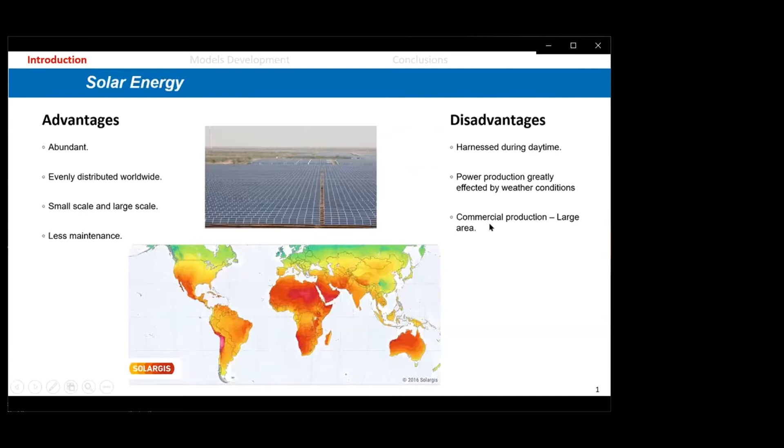As you all know, solar energy has certainly a lot of advantages such as abundance, almost evenly distributed worldwide, less maintenance, and so on. However, it also has some disadvantages, such as the fact that we cannot harness energy during night time. Also, another problem is it may require large areas for installing a PV, for instance.

Now, PV system performance. The overall performance of a PV system relies on four metrics: the performance of the radiation and optical part, then the thermal performance, the electrical performance, and the structural performance. The radiation optical performance is measured by incident and absorbed radiation. Thermal is measured through the PV cell temperature, and the electrical performance is through the maximum power and efficiency, electrical efficiency. The structural performance is a measure of the lifespan.

How long would the PV panel last, actually? Currently for polysilicon PV panels, which I will be considering in this study, the lifespan given by the manufacturer is about 25 years. But this is completely dependent on the weather conditions where the PV panel is installed.

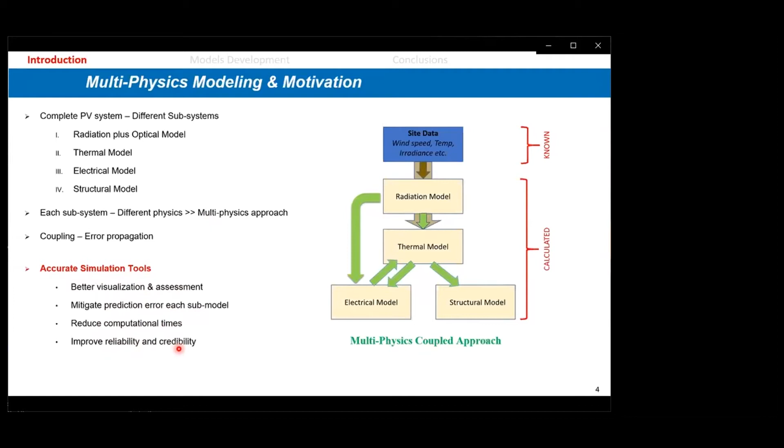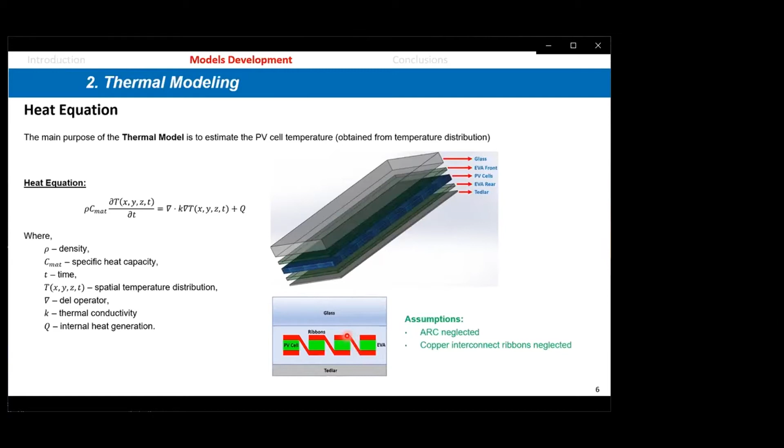In our development, we first started with a one-dimensional finite difference model to calculate the temperature distribution through the thickness of the panel. Then we extended that to a two-dimensional finite difference model implemented in MATLAB. We also used 2D finite elements and three-dimensional finite elements using the commercial software ANSYS.

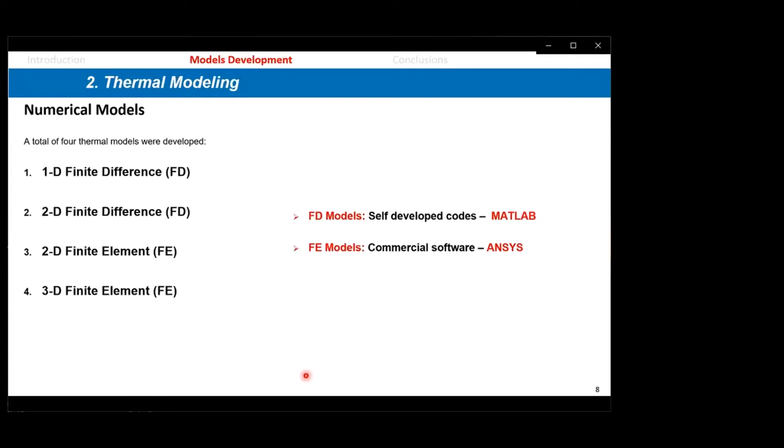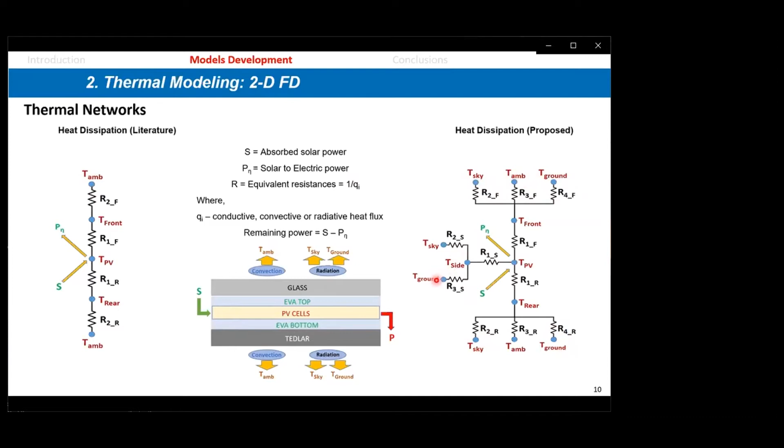As you can see here, the top sink temperatures are defined differently from the existing model. The bottom as well as the sides - we included the effect of the sides as well. By doing so, we were able to increase the accuracy of the prediction of the temperature distribution in the PV panel.

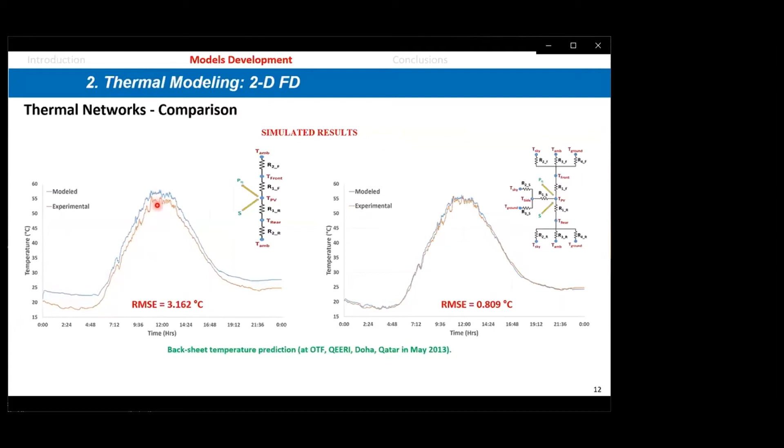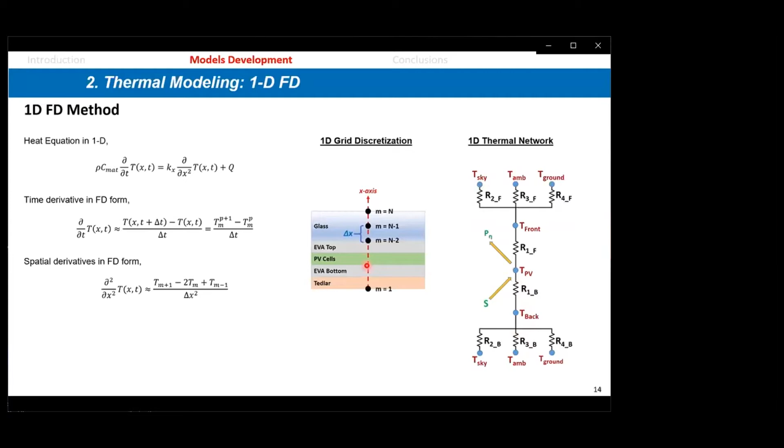Now we would also like to show you the results from one-dimensional modeling. We did the same thing for one-dimensional, because the previous results I showed were for two-dimensional finite difference. For one-dimensional, we introduced again the same boundary conditions at top, bottom, and side, and we were able to also improve the results for one dimension.

However, 2D is needed if you want to look at the distribution, not just through thickness, but also in the plane of the panel.

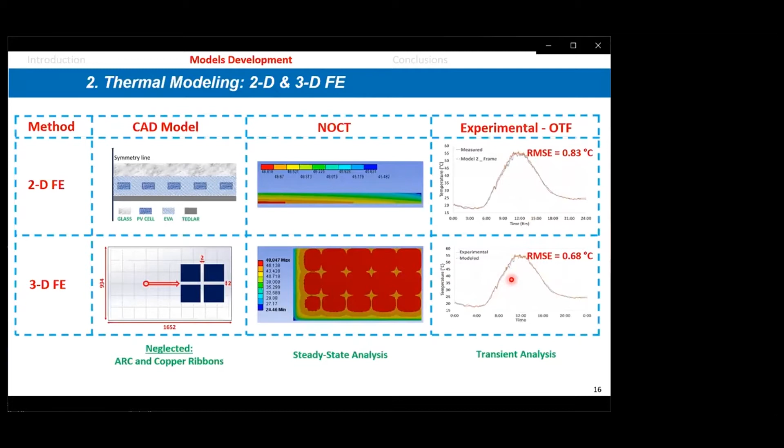So with an RMSE of 0.83, 2D is enough, in fact, unless we are looking for more details, as you will see later for the structural analysis, where we certainly need to go to 3-dimensional. But we will see how we can reduce the computational time in the structural modeling.

Now, for the electrical modeling - electrical modeling is done to estimate the maximum power. As you can see, we talked about radiation modeling, we talked about thermal modeling, now the electrical.

So either we can get the Pmax from full modeling of the IV curves, or there are also some simple relationships given in literature if one wants just to estimate the maximum power. As you can see from this paper that summarizes existing relationships to estimate the power, there are many models. So which one to trust all depends on the application.

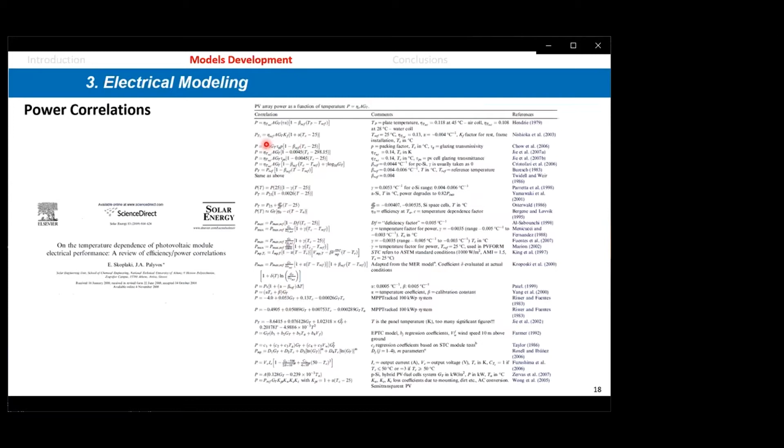In our case, we decided to go ahead and use a full model for the electrical model, simulating the IV curve using the 1-diode model. As you can see, the 1-diode model is given by this relationship here, which involves 5 parameters, and this is the drawback of this type of modeling.

So how to estimate these five parameters, which include the photocurrent, diode dark saturation current I0, series resistance, shunt resistance, and ideality factor - usually we use iterative methods or optimization techniques to estimate these. But the other thing is these 5 parameters depend on both the irradiance and the cell temperature, so how do we include and account correctly for the effect of irradiance and cell temperature?

If we look at the literature, De Soto and co-workers proposed what we call translation equations for the photocurrent, which depends on the irradiance and the cell temperature. The I0 depends only on temperature, the series resistance is constant, the shunt resistance depends on the irradiance, and the ideality factor depends on temperature. So as you can see, most of them depend only on temperature or G, one of them is constant, and only the photocurrent depends on both temperature and irradiance.

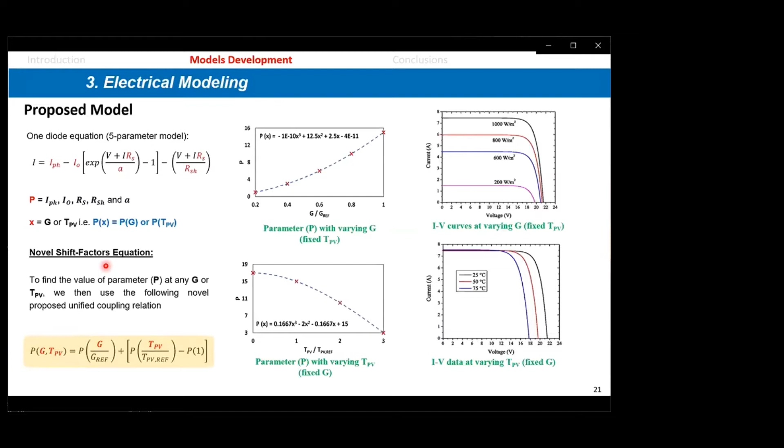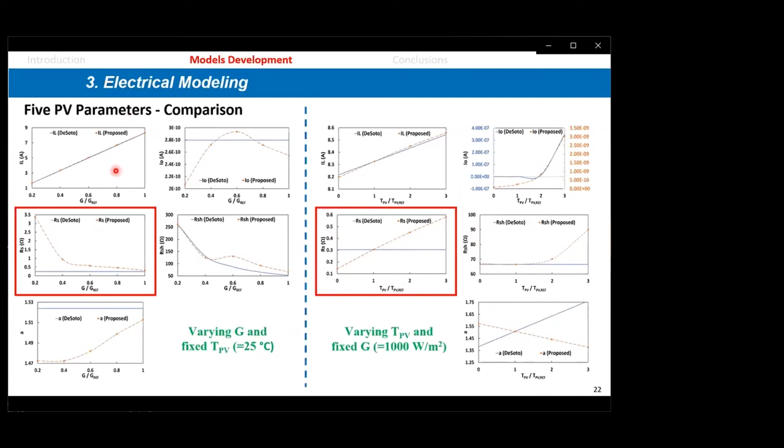If we compare our results to those of the De Soto estimates, the photocurrent is the same if we keep temperature constant and vary irradiance, but the other parameters are completely different. The series resistance is constant by De Soto, but in our case it varies drastically. The same thing if we keep irradiance constant at 1000 watts per square meter: the series resistance is constant by De Soto, but in our case it evolves a lot. So for both fixed temperature and fixed irradiance, our model predicts completely different results from De Soto, except for the photocurrent, which are very close.

Now, comparing our predicted results to IV curves, for a wide range of irradiance from 200 to 1000 watts per square meter, our model predicts very well for all of them, but De Soto predicts only the case for 1000, not the other cases. So our approach is much better in terms of accuracy of prediction.

Now I move to the last part, which is the structural modeling, where we involve continuum mechanics to analyze the fatigue behavior of PV panels and failure.

Looking at the different loads the panel is subject to: it could include wind, hail, snow, weight, and so on - this is the mechanical load. There's also thermal load, due to temperature variations during each day, and radiation, which leads to UV degradation of the EVA, the polymeric material. One may also include chemical loads such as moisture, which increases corrosion.

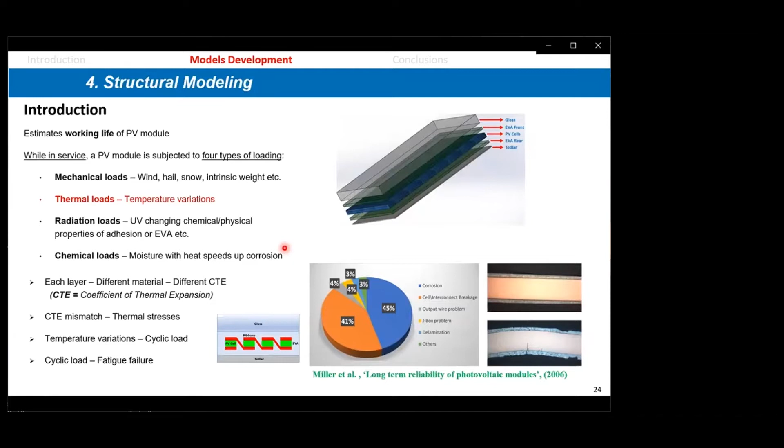Now, to perform simulations of this fatigue behavior, one can run a three-dimensional analysis, which is computationally heavy. We did not go this way. Instead, we took only one string of the panel, not all strings, and performed a two-dimensional analysis.

Once we found the area of maximum stresses or maximum deflection or deformation, we focused on that area and used a three-dimensional finite element method. Our proposed modeling is called two-dimensional global and three-dimensional local.

Based on one string, two-dimensional simulations, we define the maximum deflection, which leads to maximum stresses, and it happens to be in the central part of the copper ribbon, as you can see in this case, which is not surprising.

Now we take whatever boundary conditions in terms of temperature and stresses apply to this, and we use a three-dimensional finite element, as you can see from this 3D mesh, to analyze the fatigue behavior of the interconnect.

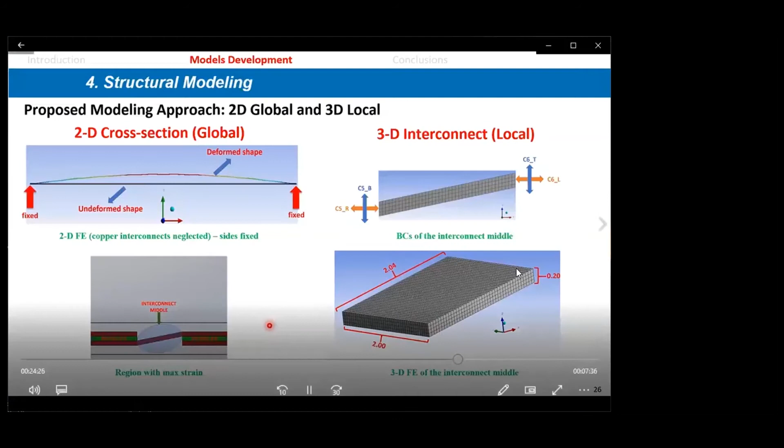Now, to do so, we need to assign mechanical properties or constitutive laws for the different elements forming the PV panel. Silicon is taken as linear elastic with the coefficient of thermal expansion varying with temperature. The copper also has CTEs varying with temperature. The glass is linear elastic, and silicon is also linear elastic. The copper is in fact elastic-plastic, so it has linear elasticity.

Then we get to the yield point, and then we have plasticity. So we considered linear elasticity with plasticity, with hardening, and this is kinematic hardening. For the EVA, which is a polymeric material, this is a viscoelastic material which is also highly dependent on temperature. We took a viscoelastic model which is temperature dependent, and that's what we input into our finite element simulations.

Now, to include the initial conditions coming from the processing or making of the PV panel, we looked at the lamination process. The lamination process consists globally of heating and then cooling. But when you cool, the copper has suffered deformation, because you can see the residual stresses here, or the thermal stresses from the cooling after lamination, is about 158 megapascal, which is much higher than the yield point. The yield point is about 94 megapascal for the copper.

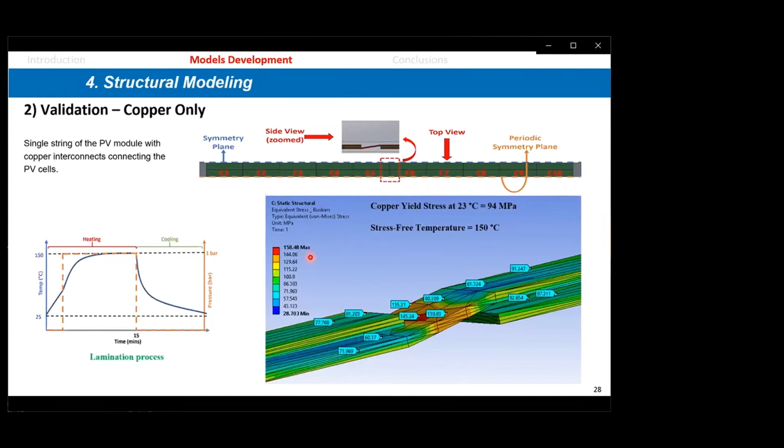This means that during the lamination process, the copper interconnect has suffered plastic deformation, so we have to account for these initial or residual stresses in our calculations. Now, to analyze fatigue, our panel, or the ribbon since we are looking into the ribbon in more detail, is subject to a cyclic temperature over time. So how do we simulate this cyclic temperature variation, heating and cooling?

We just take one day and then we repeat it many times, in terms of the variation of temperature in that day. From this we calculate the stresses and also the strains, and particularly the plastic strains, and particularly the amplitude of the plastic strains. So everything is cyclic, and in particular plastic strains are cyclic, and we are interested in amplitude.

Why are we interested in amplitude? It's because we are using a fatigue model to predict failure called the Coffin-Manson model, which gives the number of cycles to failure as a function of the amplitude of plastic deformation that the copper ribbon suffers. This model involves two parameters, fatigue ductility and fatigue ductility exponent, which are taken from measured literature relationships.

So N is the fatigue life cycle, and this is what we are looking for. This will give us a number of days that the panel will be functional before it fails. Now we take one day in January and one day in June from Doha, from our outdoor testing facility, and we simulate the stresses during that day.

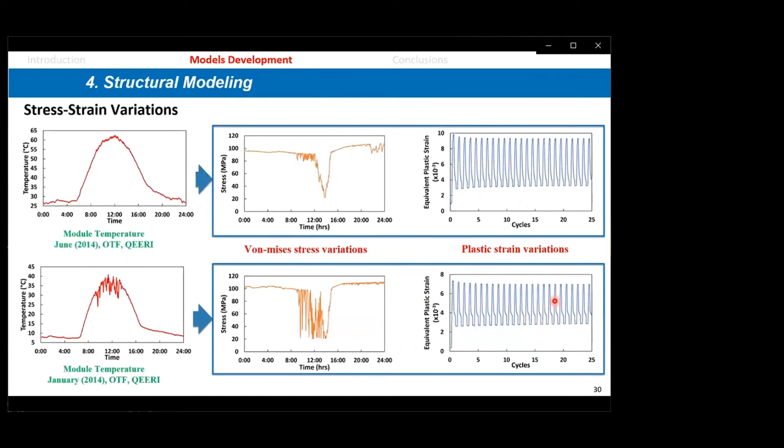So it stabilizes at 20 cycles, and now we use this stabilized delta epsilon plastic, and we calculate the number of cycles or number of days that the panel will survive before the copper ribbon fails. Here we have the number of days for January, and the number of days for June, and if you convert this into years, you can see that here in Doha, if the weather was always like the day we chose in January, it will survive 21.7 years.

But if we use the other extreme, which is June, we have only 11.2 years. So if we take the average, it's only 16.5 years, and if you compare this to what the manufacturers give, which is 25, it's much less.

As you can see, the weather conditions, such as the desert conditions in Doha with high temperatures, will drastically affect the lifetime of the panels, and we cannot count on the 25 years given by the manufacturers. So we have to make sure to redesign our panels if we want them to last longer.

So with this, I will conclude that we have developed a radiation plus optical model using a simple and efficient approach, a thermal model based on one-dimensional, two-dimensional, and also three-dimensional finite element (1D and 2D as finite difference), and in the electrical model, we have developed a one diode model.

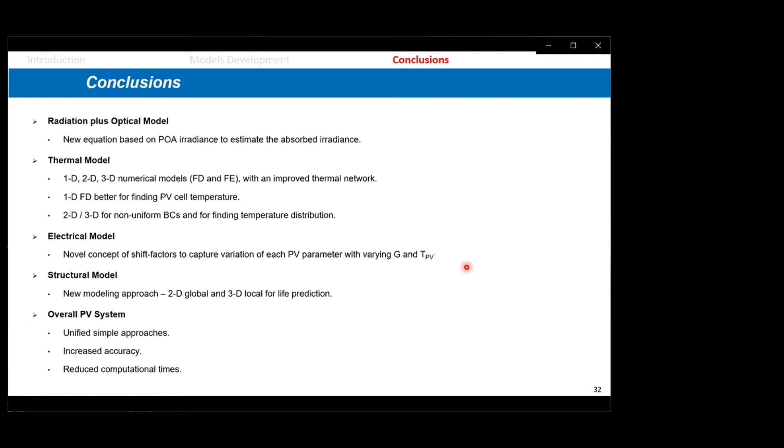And then we also developed approaches to reduce drastically the computational time. With this, I'll thank you, and I'm ready for any questions.

Thank you, Said, for this rich talk and nice results based on real PV module operating conditions. Now it's time for one or two short questions since we're a bit late. From the audience, if there are any questions. One question is: hot weather is always there, so how do you get the maximum power point from a solar module in a hot climate, or what are the strategies to eliminate the drawbacks you discussed?

I mean, the effect that hot climate has on PV modules. Did you get my question? Yeah, do you hear me? Yes, okay.

So we did not look at any particular strategy here. We wanted first to understand the failure and so on. Now, if you look at it just from a failure point of view, we have to redesign maybe the copper ribbons, different geometry, maybe different dimensions, and so on.

But we can also come up with ways for reducing temperatures such as cooling, but unfortunately cooling is out of question. A lot of people have looked at this; it's going to be very expensive and there's no efficient way of doing it. So I think it's just redesigning by selecting better materials and better geometries—that's one of the strategies.

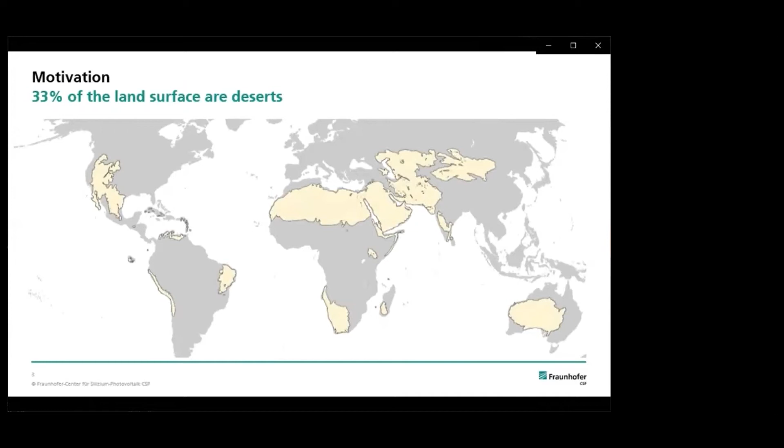So why are we talking about deserts? If you look at this map, you will find that about 33% of the land surface is covered by deserts, which is a huge amount of our global land space currently often not used. So there's a lot of potential for installing PV in these places.

So knowing the high potential for PV application in deserts from an irradiation point of view, we also need to point out that there are some additional stress factors compared to other climates in the world. You will have increased UV degradation, dust, and also high temperatures.

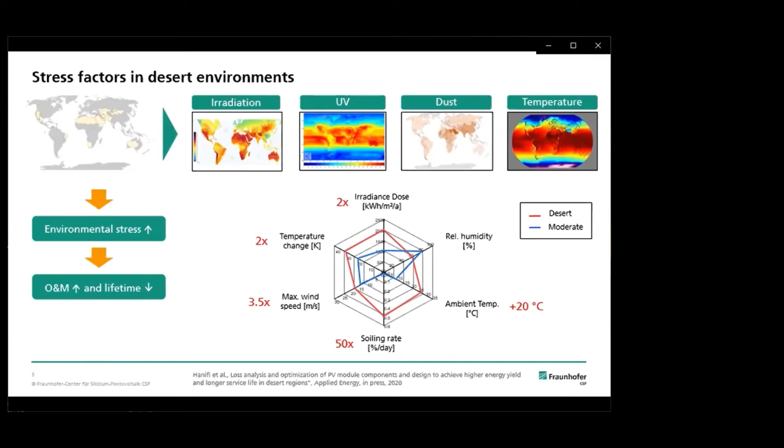Wind speeds could be much higher in some deserts, and also the temperature change between day and night could be increased. This environmental stress leads to necessarily more O&M and less lifetime of the PV modules, because of different degradation modes and performance issues, which will be shown on the next slide.

On the other hand, we don't only have durability issues, we also have performance issues, which are mainly due to high temperatures, which you can see on the right, and also due to soiling, the deposition of dust and dirt on the PV modules blocking the sunlight.

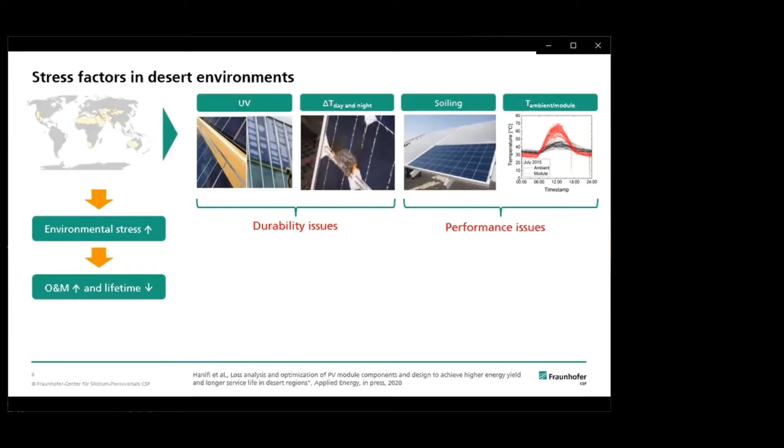The good thing is that we could address these both by optimizing our PV modules, especially for desert environments, and also optimizing our systems and O&M to increase the yield and the service life of our plant, aiming at lower levelized costs of electricity.

Now, in the following, I will pick some of the specific issues and show some results and ideas of how we can address the challenges which we face in desert environments, starting with the example of high operating temperatures.

Generally, PV modules perform badly at high temperatures. We have a temperature coefficient which, depending on the PV module technology, is in the range of 0.2 to 0.5% loss per increase in Kelvin. That means at about 20 degrees warmer, you can have up to 10% less output performance for your PV system.

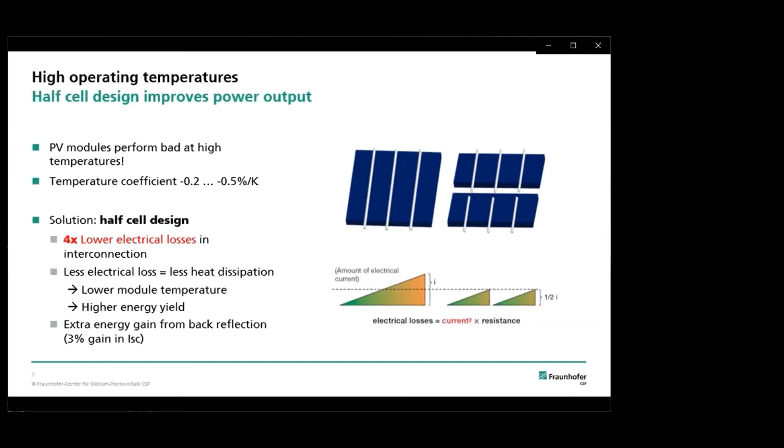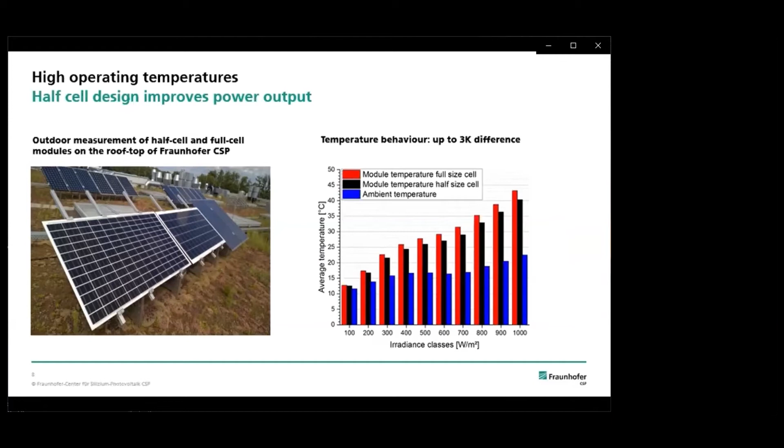Another thing I want to stress is the temperature difference problem, which causes some cell displacement. Between day and night, we typically have temperature differences up to 40 degrees in desert environments, as you can also see from the environmental data, which is an example from Qatar in July 2015.

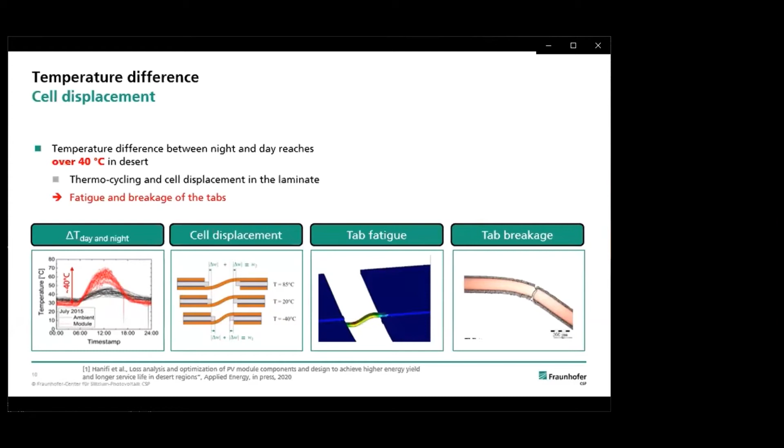These temperature differences, which is effectively a thermal cycle, will cause cell displacement in the laminate, as you can see in the example graph. Due to the cell displacement, there will be some extra fatigue on the tab because it moves all the time. If the tab breaks, then you will have a reliability issue which could lead to hotspots, or simply a reduction of your PV module output power.

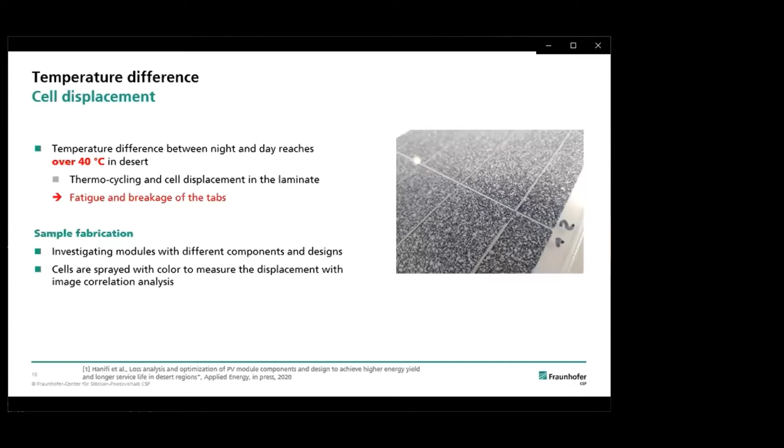Same as on the past slides, half-cell modules could be a solution to that, and here we want to present results which we did on different tab interconnections. For that we used different components and designs of PV modules, and in order to see the cell displacement within the module, we sprayed it with color to measure the displacement with an image correlation analysis.

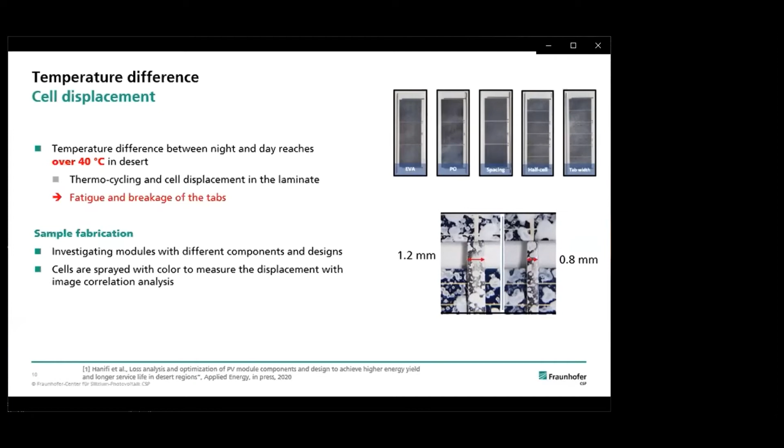Here you can see some examples. We used EVA, we also used polyolefin as an alternative. We changed the spacing between the cells, and we also moved from full cell to half cell design, also changing the tab width, which could also improve the optical performance of the PV module.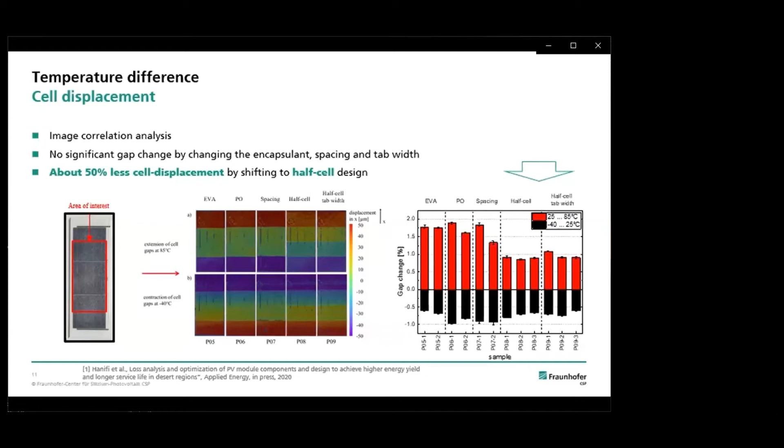So half cell modules could really reduce the issue of interconnector breakage, which is a nice result.

Now I want to jump into the topic of UV degradation. As we have seen before, in the deserts we could have twice higher irradiation doses overall, which means also higher UV dose. But in addition to the irradiation, we also have a spectrum-dependent component, further increasing the UV dose by about 50%, because of the AM1 spectrum compared to AM1.5, which you have in typical climates. This will lead to discoloration and delamination, as we have also shown before.

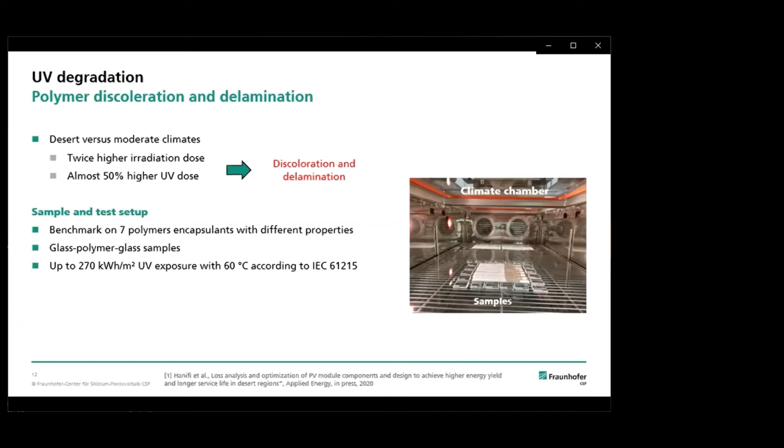In conclusion, one can say that it's really important to check materials for their reliability according to UV exposure, and this can really change the output performance.

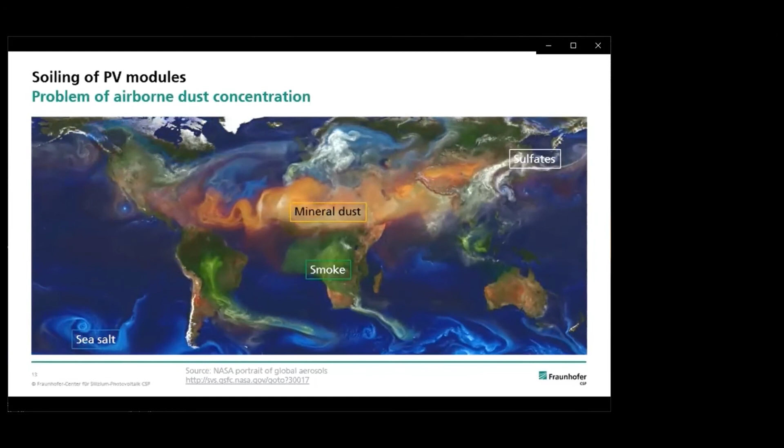As a result of high airborne dust concentration, dirt accumulates at the glass surface, blocking the sunlight and significantly reducing the power output by up to 70% or even more. In the photograph, you can see an example of a PV plant in India, which got heavily soiled and partly cleaned.

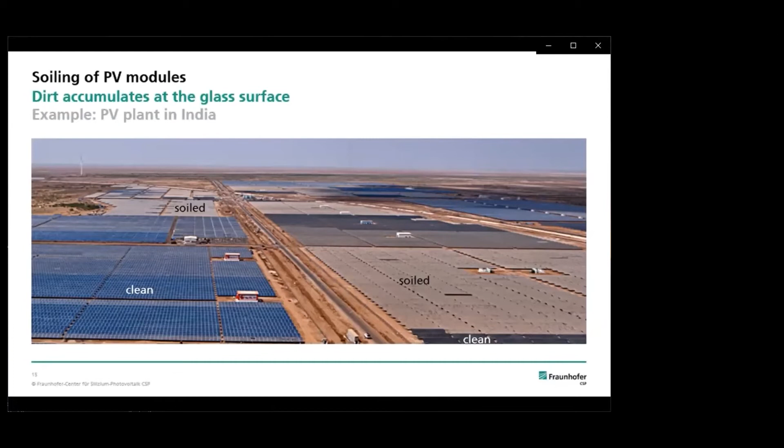The most common approach to mitigate soiling is currently cleaning, so this is the state of the art. There you can divide into different methods like manual cleaning, semi-automatic cleaning, or fully automatic cleaning. Actually there's no universal method recommended. However, often wet cleaning is preferred, but it strongly depends on the local capital and labor costs which method plant operators choose.

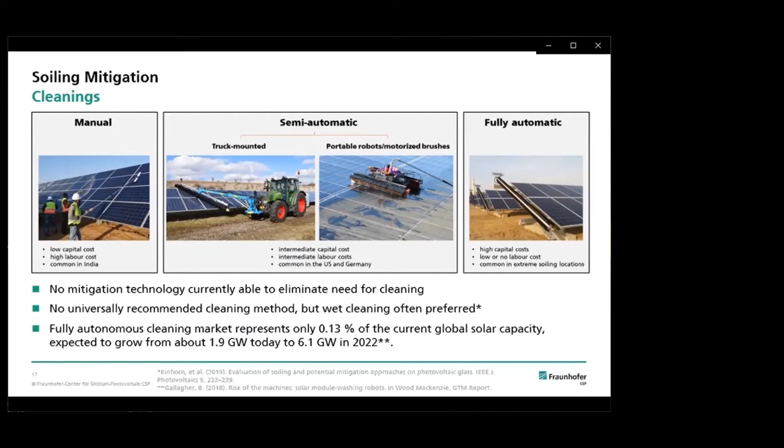Let's start with the anti-soiling coatings, which are more or less the holy grail in soiling research, depicting coatings which can reduce the soiling in a passive way.

There are different mechanisms which we found to be important, which could reduce soiling, including the effect of rebound, when particles bounce directly off the surface during impact, and also the effect of resuspension when wind blows off the particles from the surface. In addition, there have been also some studies on the interaction with dew and rain, and there we detected the processes of caking, which is kind of particle agglomeration at the surface, which could reduce the optical losses, as well as cementation, which fixes the particles at the surface and permanently glues them together with the glass. Last but not least, also self-cleaning, for example during rain.

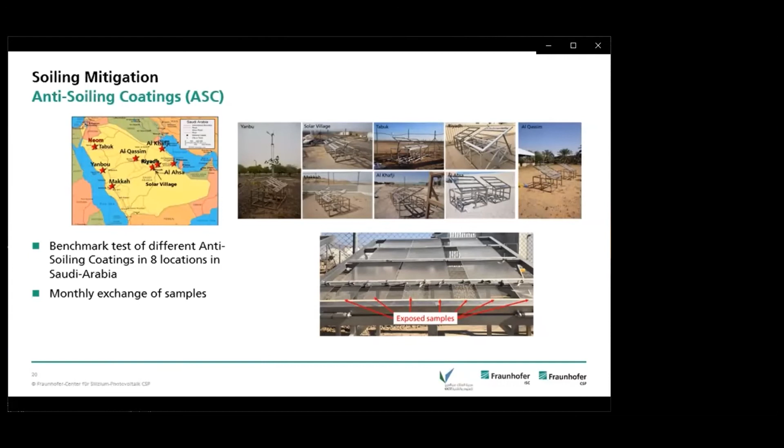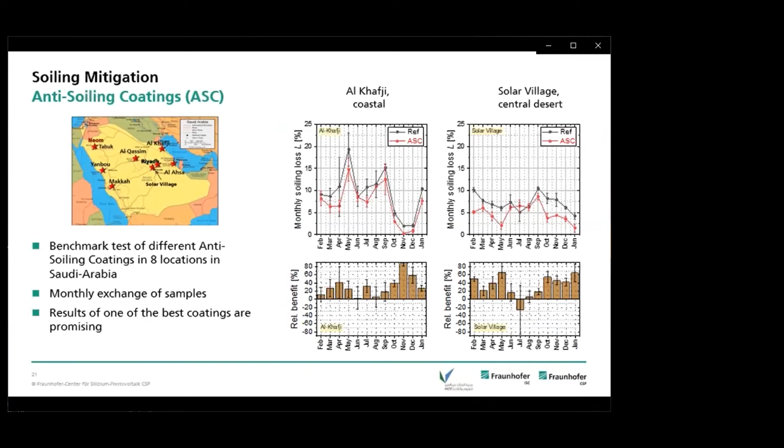In order to design these coatings, we also used laboratory soiling experiments with a new test setup which we designed, and which is also commercially available, together with the standard for soiling testing, the VDI 3956.

Another approach could be the change of tilt angles and the use of solar trackers. It is known from literature and many outdoor experiments that the steeper the tilt angle, the lower the soiling rate. Also, an important fraction of soiling deposition occurs during the night.

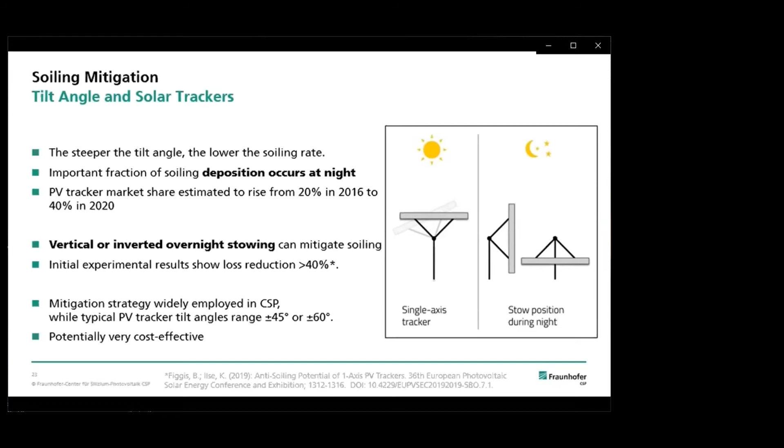We've seen that if one uses, for example, nighttime stowing at 90 degrees or 180 degrees, one can decrease the soiling rate by more than 40%, which we have also seen in outdoor experiments. This mitigation strategy is also widely employed in concentrated solar power. However, the typical PV trackers on the market have only angle ranges between 45 and 60 degrees, so it still needs to be checked how cost-effective one can adopt this.

Here I want to show some of the outdoor results we did on small glass samples, comparing different tracking algorithms, starting with a reference called B. When we put the glass samples to 90 degrees during the night and also to 180 degrees during the night, while they were tracking the sun during the day, we had an average soiling reduction of 41% for vertical and up to 50% for upside down.

This was also shown already in 2013 by First Solar, that even with normal trackers, you can just use steep nighttime positions, strongly reducing the soiling with up to 30% already at 45 degrees stowing.

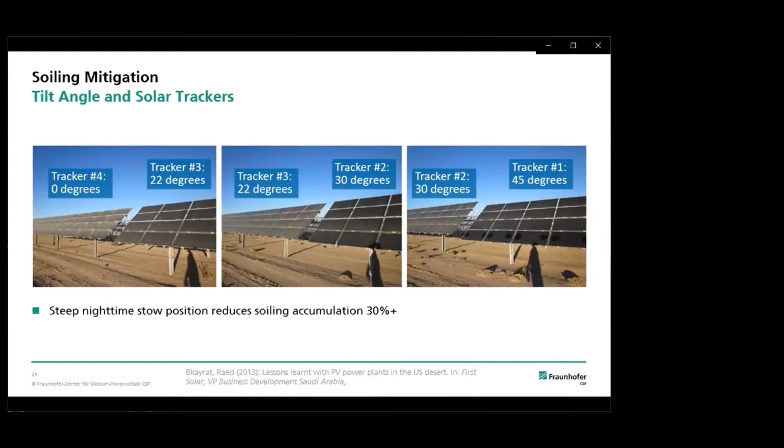Another technique is the electrodynamic screen. Here the cleaning is performed by a time-varying electric field at the surface of the PV module, which repels the dust particles. This technology was formerly developed for Mars robots by NASA, and it was also successfully tested in the laboratory and in controlled environments.

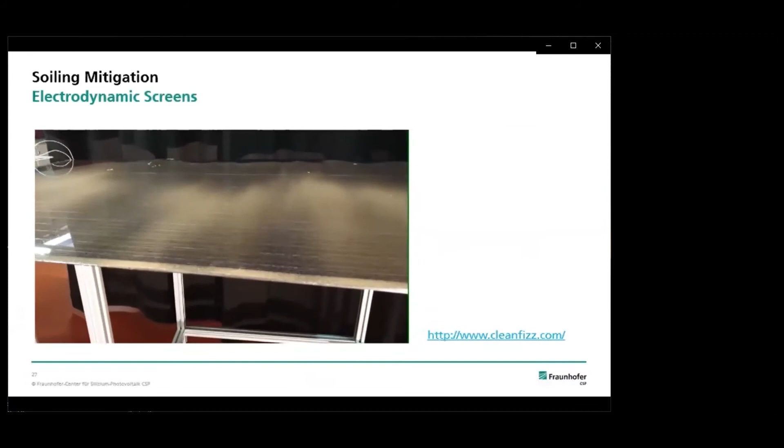However, we also have some limitations. It has some problems with harsh conditions and especially with high relative humidities, and currently the costs are very, very high. Nevertheless, I want to give you an impression of such a system here. You can see how it looks when there's dust on the surface, and then it's turned on and the dust moves towards the surface edge and comes down.

A further mitigation strategy could be surface heating. Since most of the soiling deposition occurs during the night and is also correlated to dew formation, which happens mostly during night and early morning hours, soiling can be mitigated by preventing the dew formation.

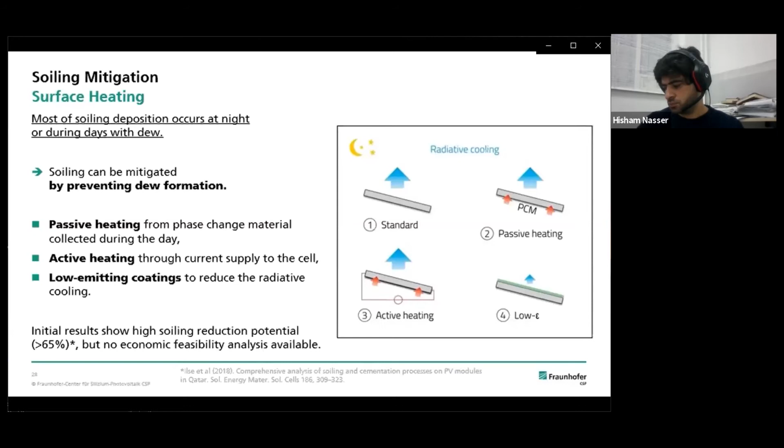For that, we can use different concepts like passive heating, for example using phase change materials, also active heating, or using low emitting coatings. To evaluate this, we conducted an outdoor study in Qatar for 4 weeks, using a set of samples with one glass coupon being heated by a heater pad and one unheated reference.

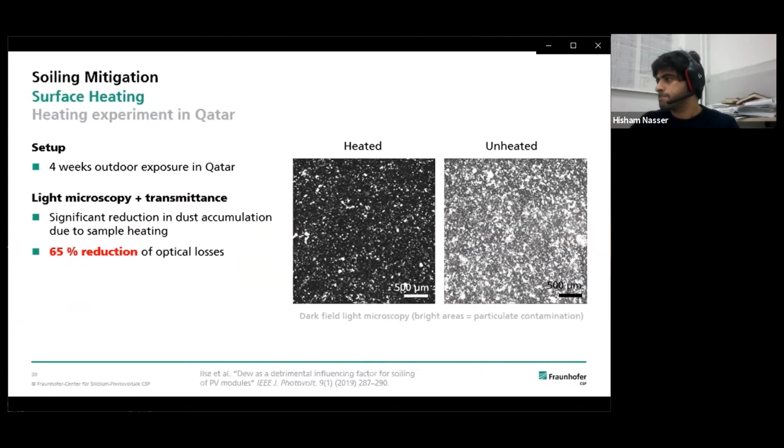After 4 weeks, we found a significantly reduced surface coverage for the heated coupons, which resulted in about 65% reduction of the optical losses. Looking at the samples by scanning electron microscopy, a significantly reduced amount of needles was detected for the heated sample. These needles are cementing materials in the region of Qatar, so by heating we strongly reduce the cementing effect. Accordingly, it could be proven that the needles form at the surface during dew events.

Because of the high potential of the anti-soiling benefits, the prevention of dew and cementation was suggested by us as a possible new soiling mitigation strategy.

In general, soiling can accumulate both homogeneously or inhomogeneously on the PV modules, for example at the bottom frame. The PV module orientation and design can reduce the impact from this inhomogeneous soiling, as will be shown in the following.

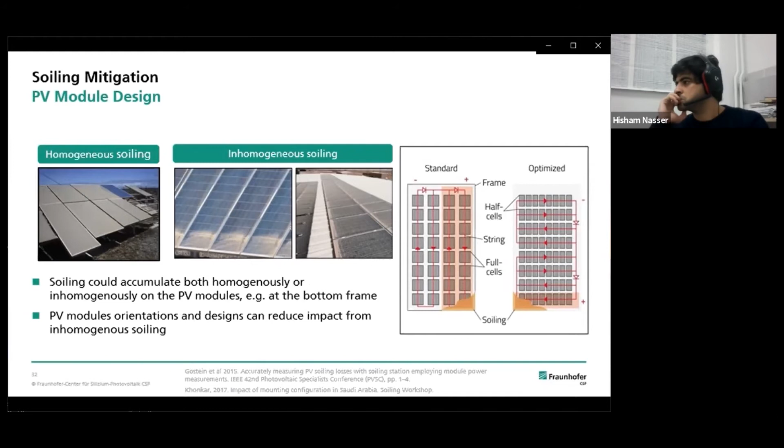The problem with this inhomogeneous soiling is the partial shading, which can degrade the power output significantly more than the same amount of dust spread uniformly. For example, shading only 50% of a single cell can trigger the bypass diode of a string.

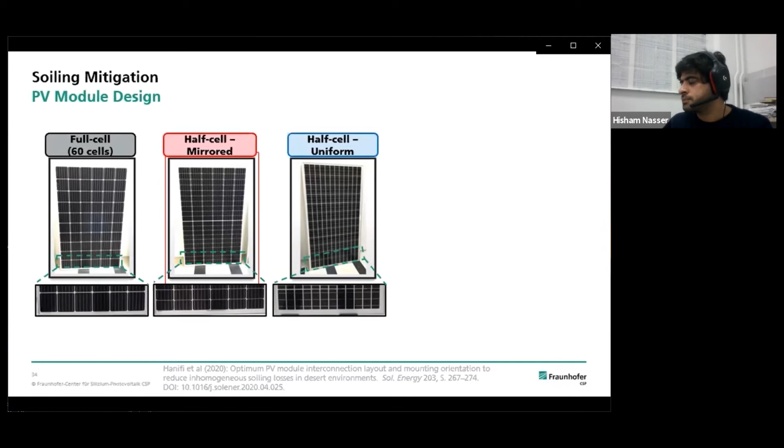Accordingly, we can use frameless modules to avoid dust collection at the edges, but also different orientations and the design of half cell modules can be used. We did a nice experiment with different PV module designs to show the different impact of inhomogeneous soiling, comparing the performance of full cell, half cell mirrored, and half cell uniform design, while shading the lower row of solar cells.

So here in this example, you see how it looks if we shade 50% of this lower row. As you can see in portrait mounting, the half cell uniform design outperforms the full cell of 60 cells, which is completely gone if the bottom row is shaded. So in the case of portrait mounting and edge soiling, up to 65% higher energy generation is possible simply by changing or choosing the PV module design.

Last but not least, site selection and adaptation could be used as a soiling mitigation strategy. Soiling mitigation already starts with the plant site selection and design. For example, the closer we are to a dust generation source, the larger the soiling risk. And we could look for climate conditions which favor or limit soiling deposition, using different approaches.

For example, we can design our system so that cleaning is easier, and we also reduce the number of dust sources by paving the roads, for example. We can also install dust barriers or use chemical soil stabilizers. The solutions have to be tailored to the specific sites, and there's a lot of research to be done, because so far I'm not aware of any study which looks really into detail of that.

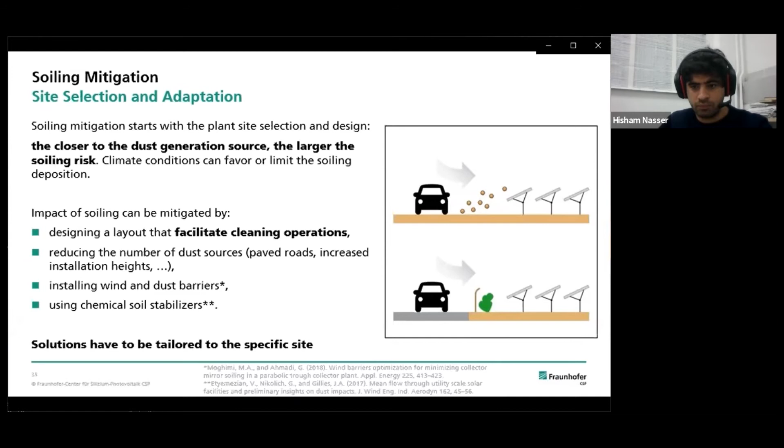In this slide, you can see again a summary of the discussed soiling mitigation strategies. In A, you can see the anti-soiling coatings, which reached up to 25% reduction in various experiments at feasible costs. However, the coating technology still needs to be adapted to the local conditions, and there's currently no one-fits-them-all solution.

The option of trackers seems reasonable, as there is a very big trend towards one-axis tracking in PV in high insolation areas. We could combine this with adapted night stow positions, vertically or upside down, with a soiling reduction potential of up to 50%, as shown during some first experiments, for example in Qatar. We still don't know if the costs are feasible for adopted tracker designs.

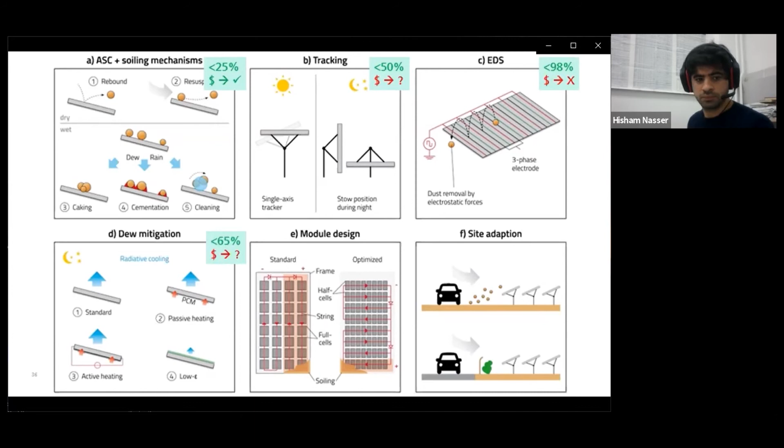In figure C, you can see again the electrodynamic screens, removing the dust with electric fields. For the time being, this technology seems to be efficient in dry environments, but it's way too costly. Dew mitigation was firstly proposed by our group, and we showed a reduction potential of up to 65%. However, the cost feasibility still needs to be proven.

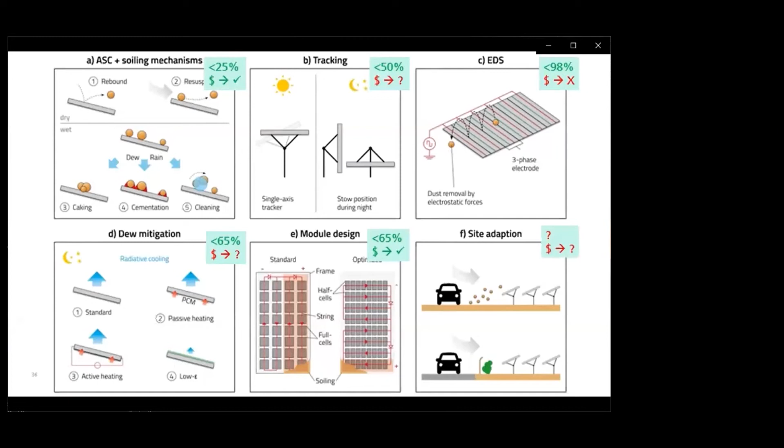The effect of inhomogeneous soiling could be simply reduced by up to 65% by using different module designs which are already in the market, so there is no cost constraint here. And last but not least, the adaption of the site—there we still need to do more research to see how this helps.

Now I want to summarize my talk. I hope you've seen that PV application in desert environments could imply high gains due to the increased irradiation, but we also have some stress factors resulting from the environment, which could lead to reduced PV performance and also reduced lifetime, leading to higher costs. These are especially high temperatures, the effect of soiling, UV degradation, and also high temperature changes.

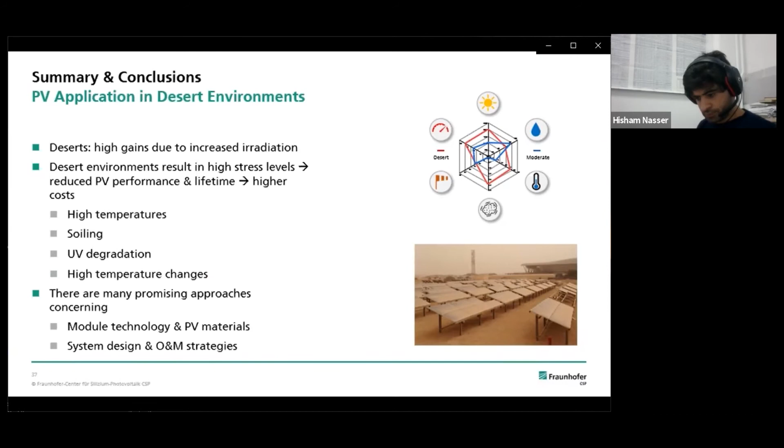However, there are many promising approaches concerning module technology and PV materials, as well as system design and O&M strategies. And with that, I want to thank you for your attention, and I'm open to questions.

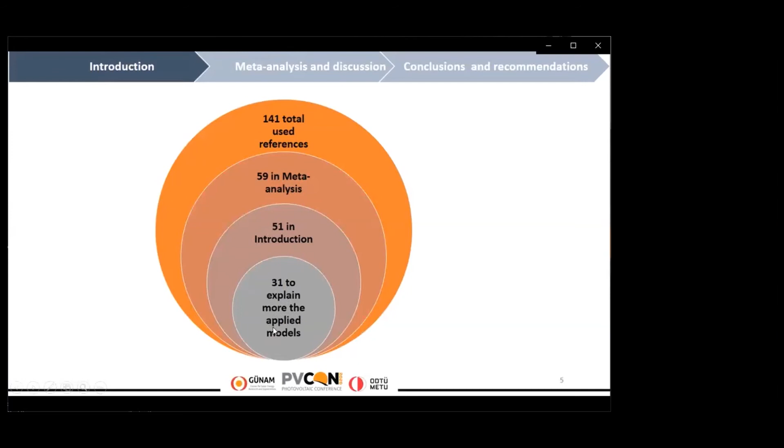As we are talking about a review, it is necessary to discuss the number of used references. As you can see, the total references used is 141, with 59 used in the meta-analysis, 51 in the introduction, while 31 references have been used to explain the applied models further. The used references include only journal articles, conference papers, and book chapters. The search for relevant publications was conducted based on the following keywords: solar energy, soiling, and modeling prediction, in the following databases.

So let us move now to the meta-analysis and discussion.

The main part of the review is based on the summary presented in this table, where we summarize the different published papers. The summary includes the location of measurements, the used technology, the applied model/methodology, and comments. In the comment parts, we precise the performance of the model, the main conclusions or recommendations resulted, not according to us, but according to the authors themselves.

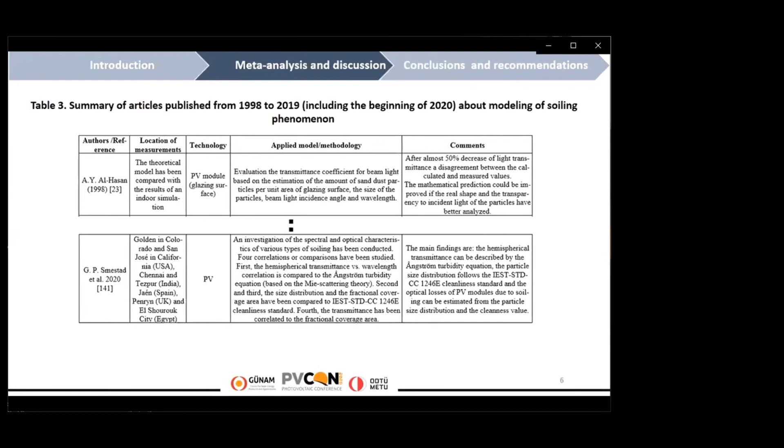From the body of the work performed, it has been concluded that many models have been used to study the soiling phenomenon. These have been applied on different technologies, as you can see here. The PV technology is ranked first with a percentage of 79%, followed by CSP technology with 13%. This part, which is all technologies, includes models that we expect to be useful for all technologies as they concern the simulation of soiling potentials.

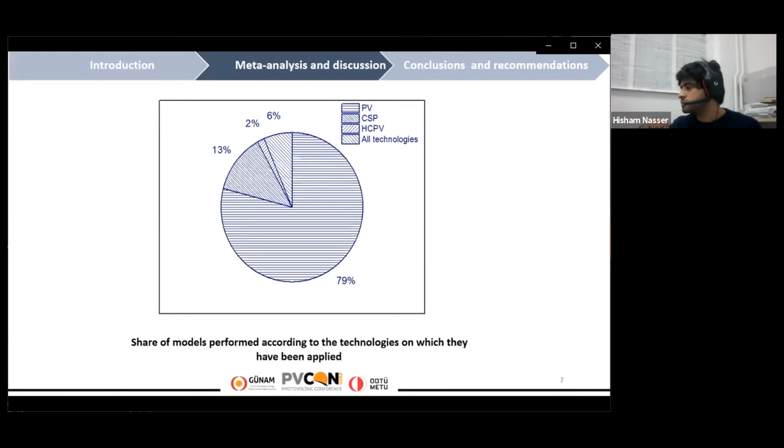To be able to analyze the state of the art, the articles gathered and summarized have been divided into two groups. The first group is the theoretical modeling, which represents all models based on physics laws, and the statistical modeling, which focuses on models based on statistical analysis of data.

The theoretical modeling part shows a variety in terms of applied models, with a high use of solar radiation attenuation through the atmosphere laws. The analysis revealed that the construction of this type of modeling is based on some hypotheses that are in most cases far from reality. These hypotheses are, for example, that the particles are spherical and have the same size, the particle distribution is uniform, and the second layer of particles is deposited or formed just after the full formation of the first layer. This explains the low percentage of use of this kind of modeling.

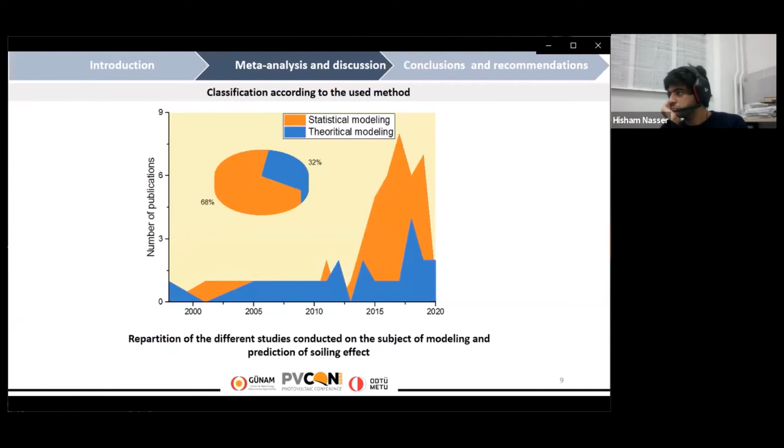According to the recommendation of this reference, the modeling of soiling should be done in two parts. The first should concern the model which will predict the amount of dust mass deposited according to the climatic conditions, while the second part should focus on the model which will correlate the amount of dust mass deposited and PV power losses due to soiling.

Based on this statement, we made the following classification, which includes all the processes of soiling. As you can see, there are three main elements: the weather conditions, deposited pollutants, and losses, from which we extract 6 categories or groups.

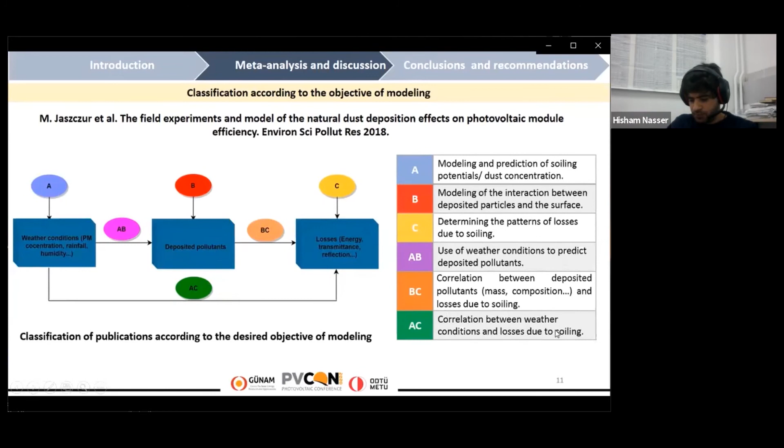For each group, we presented the number of publications. Based on this figure, it can be seen that the highest value belongs to group BC, followed by group AC, then group C, and at the end we have group A and group AB. The two models suggested by the previous reference are group AB and BC, and these two groups are complementary to each other.

For part B, which is about the deposited pollutants, there are many published papers which describe and model the interaction between particles and the surface. This part is also an important one, but it is far beyond the scope of the present review.

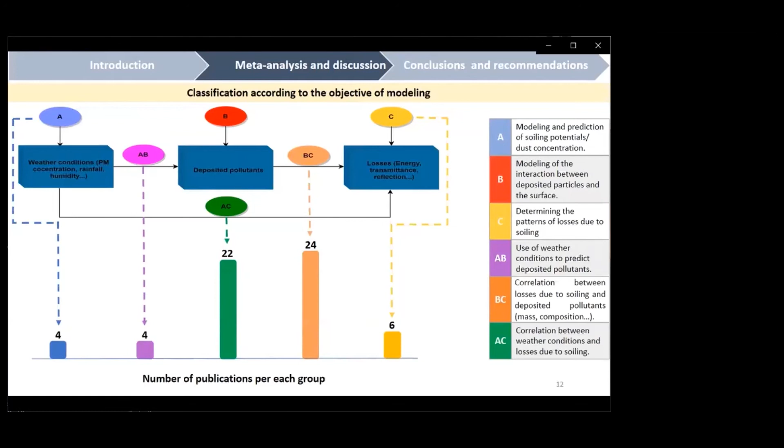So from the summary of reviews we mentioned previously in the introduction, the factors that affect soiling phenomenon can be categorized and summarized as follows: module characteristics, climatic conditions, surrounding environment, exposure conditions, and soiling properties.

For exposure conditions, module characteristics and the surrounding environment are mostly fixed for every module in a specific study due to the difficulty of obtaining data for all conditions. Not taking into consideration all factors represents a lack in almost all models, and in many papers this has been considered one of the causes of low model performance.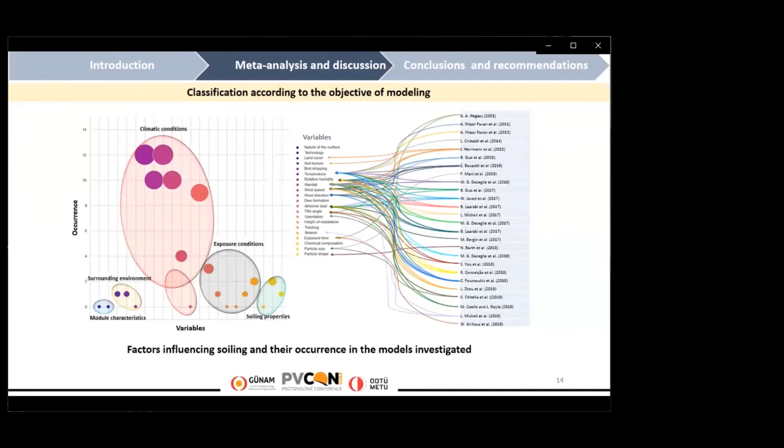To sum up, the review shows a variety of applied models and methods. Each model has its own strengths and weaknesses. However, in order to approach the complex behavior of the soiling phenomenon and predict it over time accurately, more data for long periods is still needed. Moreover, all parameters affecting soiling should be taken into consideration.

Furthermore, as it has been previously proved that dust concentration ranks first in predicting soiling losses, the use of existing databases of soiling potential adjusted using weather conditions from existing databases or meteorological stations seems to be a low cost and valuable method to predict soiling losses.

Finally, instead of suggesting new models, it will be wiser to test published models that have proved good results in different sites and on different technologies, to overcome their limits and achieve an accurate and well-tested model.

This review will help researchers working on this topic gain an overview of the models used or applied. It will also help them better choose the right direction in modeling and predicting soiling phenomena. Understanding and mastering this phenomenon will not only prevent investments from losses, but also save the precious natural resource of water by determining mitigation techniques wisely.

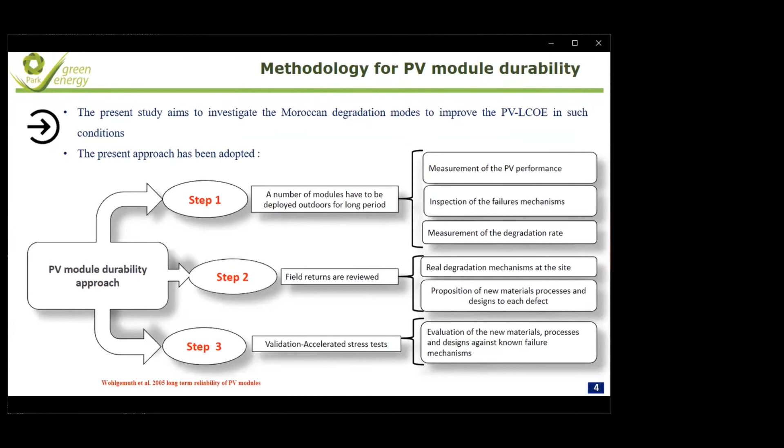As the methodology of our work, in the present study, the PV module durability was carried out according to the approach illustrated in 3 steps. The first one is the deployment of a number of PV modules in outdoor conditions for a long period, more than 3 years, for the inspection of the failure mechanisms specific to the harsh climatic condition of Morocco. The second step is the proposition of new materials, processes and designs to address each defect. And the third one is the validation of the proposed solutions by accelerated aging tests and also by outdoor exposure.

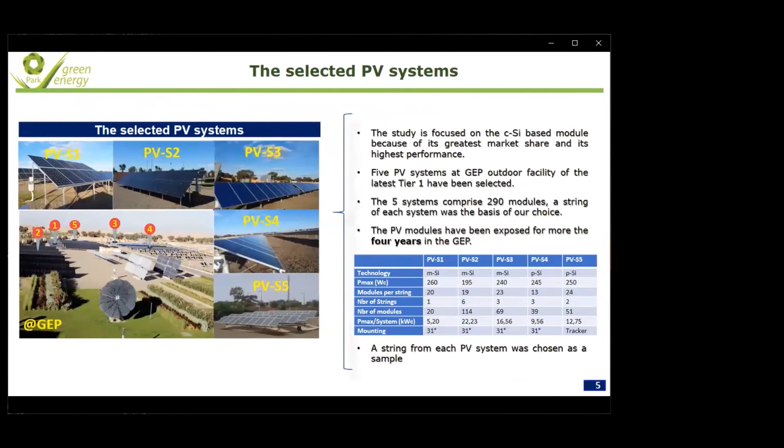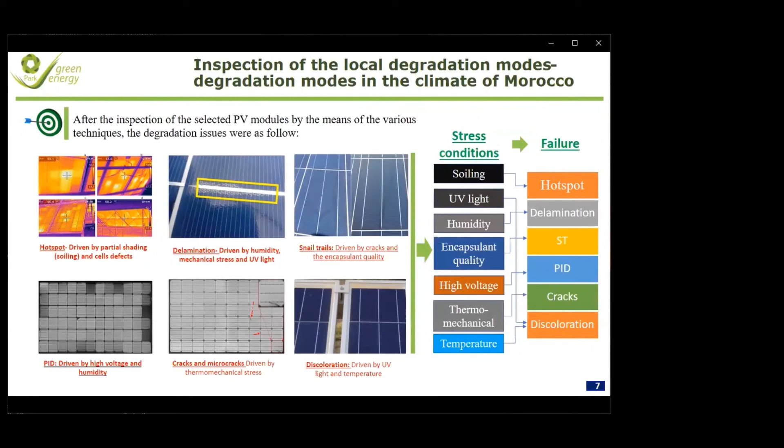In the present study, we focused on the crystalline technology by selecting 5 PV systems from 5 different manufacturers. For each system, we select a PV string as a sample. For the inspection of the module degradation mechanisms in the Green Energy Park platform, we resorted to advanced techniques like electroluminescence, infrared imaging, and the measurement of the electrical parameters, in addition to the visual inspection. As a result, after the inspection of the selected PV modules, various degradation modes relating to the climate of Morocco have been observed and detected. These degradations are manifested as hotspots, delamination, snail trails, PID, cracks, microcracks, and discoloration.

In parallel, the electrical parameters were measured and compared with the ones provided by the manufacturers, and in this study, the measurement of individual modules was performed in real conditions with the I-V tracer. For high accuracy of the I-V curve measurement, the measurements were taken around noon and at clear sky condition, with irradiance intensity between 800 and 1100 watts per square meter. Also, before any measurement, the selected PV modules were cleaned to eliminate the effect of soiling.

For the results of the power degradation of the 5 inspected PV systems in Morocco, these figures show the individual power degradation rate for the PV modules of each selected string, as well as the average degradation rate. As clearly seen, for the 5 systems, all the PV systems show high degradation rates. This result compares unfavorably with that given by the manufacturer, 0.8% per year as an average degradation rate for crystalline technology.

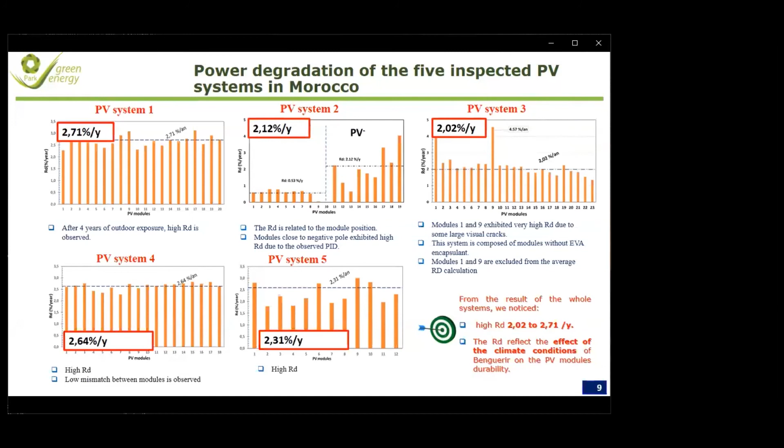In fact, the power drop in the present study is mainly related to the harsh climatic condition of the studied site. In addition, the high degradation rate reflects a relatively low expected lifetime for the module, as the manufacturer gave about 25 years as lifetime of the PV module with a maximum of 20% of power drop. The degradation rates found in the present study are very high. So this may influence dramatically the development of PV plant projects, especially the plant's economic calculation and payback time. So it is recommended in the present study to develop a new PV module generation, called a desert module, dedicated to harsh desert climate.

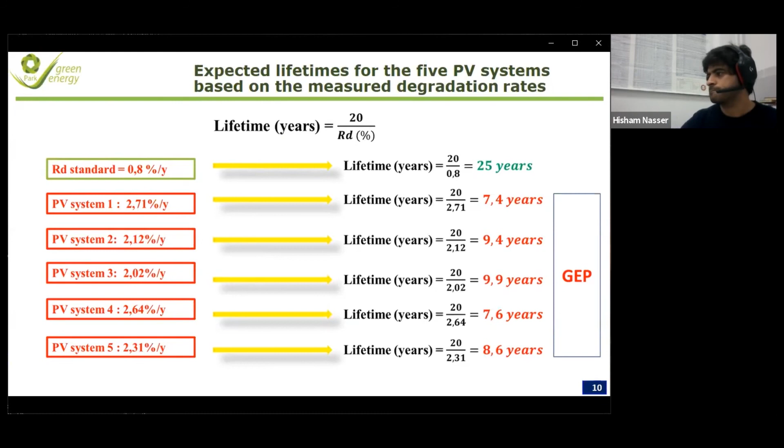This is by mitigation of the real observed degradation in Morocco and the different observed degradation modes in the Green Energy Park. So our next step will be the proposition of some solutions for a desert PV module based on the observed degradation modes in Benguerir, Morocco. In order to further quantify the results of the analysis of the Moroccan degradation modes, we consider a classification based on the severity of the different observed degradation modes.

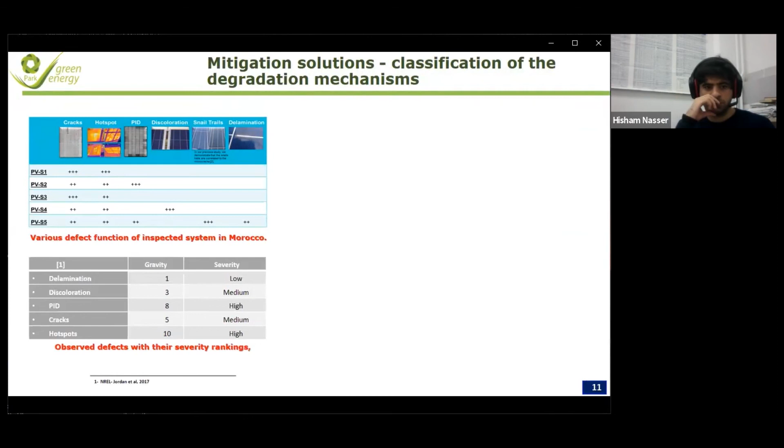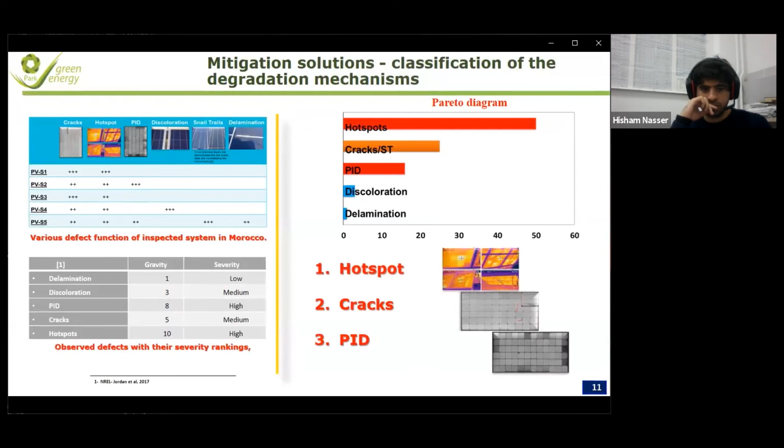These two tables: the first one presents the various defects as a function of the inspected system in Morocco, and the second one presents the observed defects with their severity ranking as reported by Jordan et al. Accordingly, the Pareto chart for the defects reported in this study is plotted. And as clearly seen, the predominant degradation modes in this survey are hotspots, cracks, and PID. So, in what follows, mitigation solutions against the three dominant modes in the climate of Morocco are recommended.

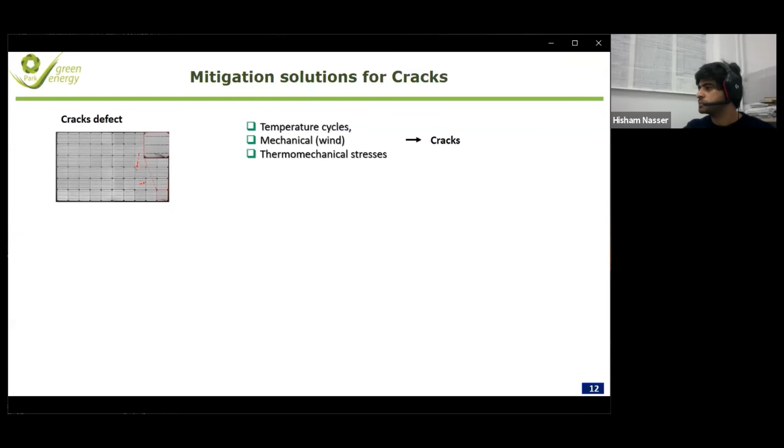Let's start with the first one, which is cracks. During the operation of PV modules, temperature cycling, mechanical stress, and thermomechanical stress are the main causes behind cracks and microcracks in PV modules. As solutions, we proposed some at the cell level, at the module level, and at the system level. At the cell level, we propose to use half cells instead of full cells in order to reduce the problem of cracks. In parallel, we can reduce the cell temperature by using PERC technology and also improve the efficiency of the PV module.

At the module level, using encapsulation material with less stiffness can improve the mechanical protection of the PV module. At the system level, we recommend using 6 fixing points instead of 4 in the PV module in order to reduce the bending of the module after the effect of wind load.

For the hotspot problem, this results from internal issues like cracks in the PV module, inhomogeneous dust deposition, or heating of the bypass diode inside the junction box. So a mitigation solution for hotspots is necessary, and it is important to take into consideration the associated cost.

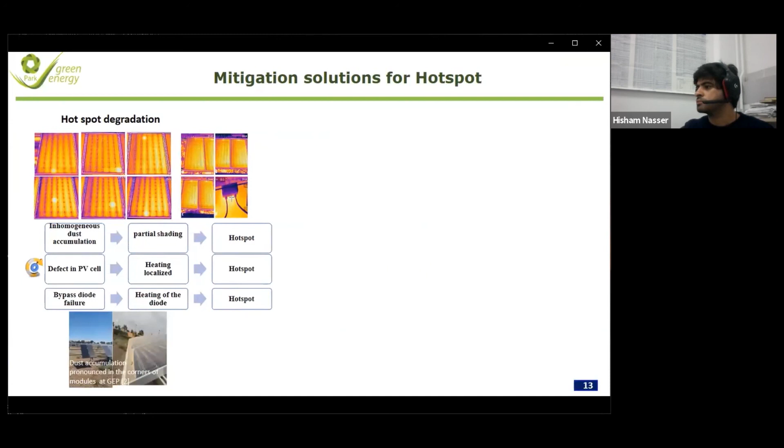First, it's necessary to reduce cell defects by preventing cracks and PID. Also, it's necessary to prevent partial shading in the PV module, which is very pronounced in the climatic condition of Morocco and especially in Ben Guerir, by cleaning or by using an anti-soiling coating to improve durability and gain higher power output against the soiling effect.

For the heating of the bypass diode inside the junction box, several manufacturers have introduced a new class of active bypass diodes. This technology uses transistors to produce behavior similar to diodes. With this technology, the junction box can be simplified or eliminated, and the number of diodes can be increased, which can improve performance in partial shading conditions.

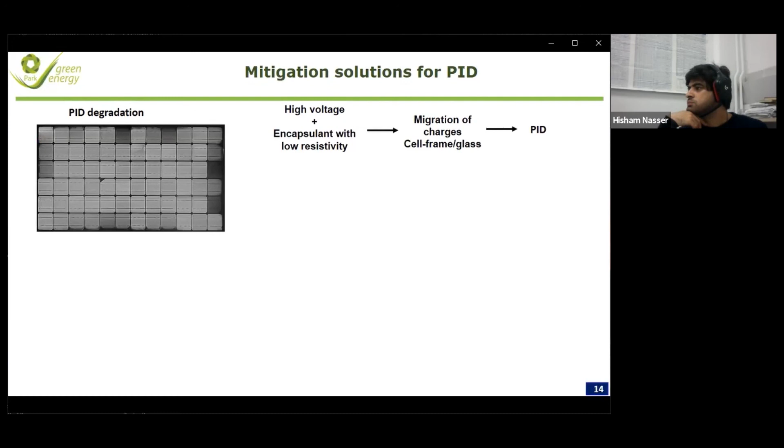For PID, the encapsulating layer of the cell must provide perfect electrical insulation in order to mitigate this problem. As you know, in the PV market, EVA remains the most dominant material due to its low cost. However, there are certain polymers that can be considered as alternatives, such as PVB, TPU, silicone layer, polyethylene, and ionomer.

The encapsulant with low water vapor transmission rate and high resistivity is the most important solution. In the present study, polyethylene and ionomer have similar, high resistivity values, but polyethylene has other interesting processing properties since it requires no changes to the machine. So polyethylene could be a good and reliable encapsulating material thanks to its low cost and high resistivity.

Finally, after the inspection of 5 PV systems in the climate of Morocco, we found that the measured degradation rates are higher than that given by the manufacturer, which is 0.8% per year, due to the harsh climatic conditions of Morocco.

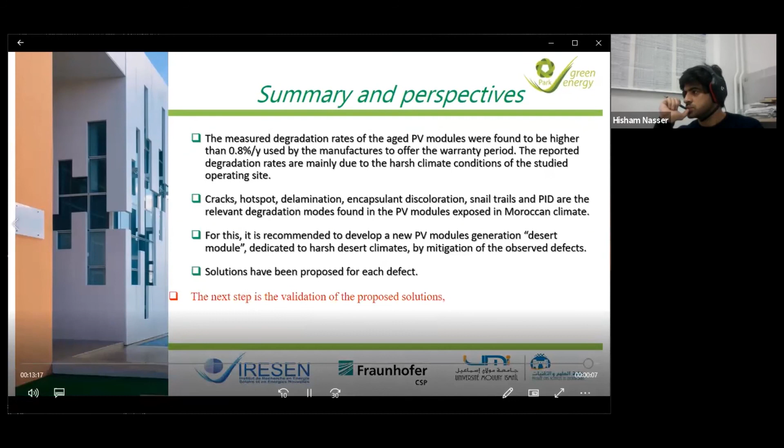The observed degradation modes are cracks, hotspot, delamination, encapsulation issues, discoloration, snail trails, and PID. For this, we recommend developing a new PV module by mitigating these real degradation modes in the climate of Morocco, with some proposed solutions. The next step is validating the proposed solutions through accelerated aging tests and outdoor testing in Morocco. Thank you for your attention.